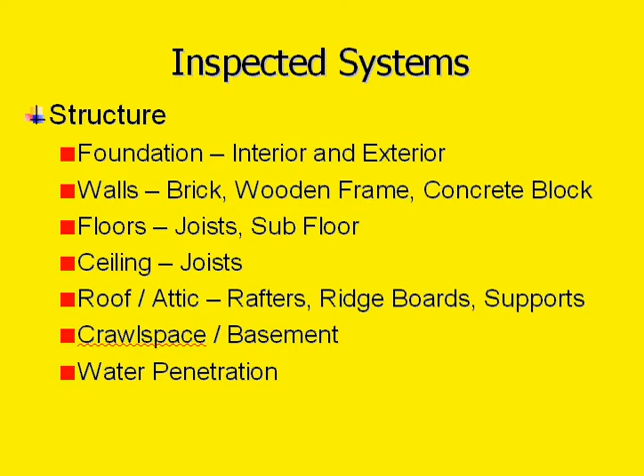Okay Michael, I've put together a presentation that could be the first webinar. This is by no means finished, it's just the start of it, and we're going to go through the things that should be inspected during the webinar. This is one of the first slides, and I'm just going to click through the slides so you can review it. You'll also get a copy in a PDF file, and I'll also do this as a presentation video online so you can look at it on your phone.

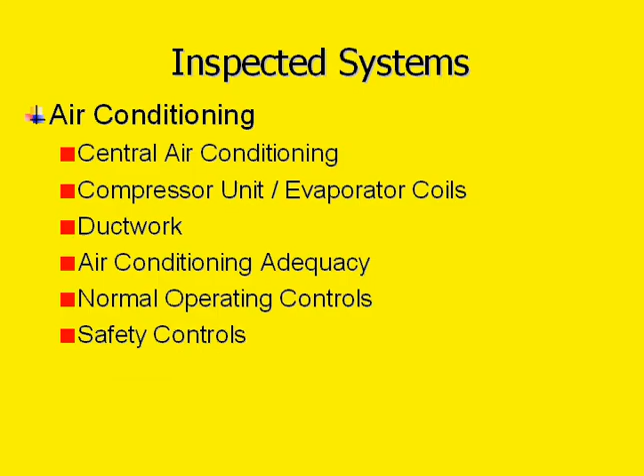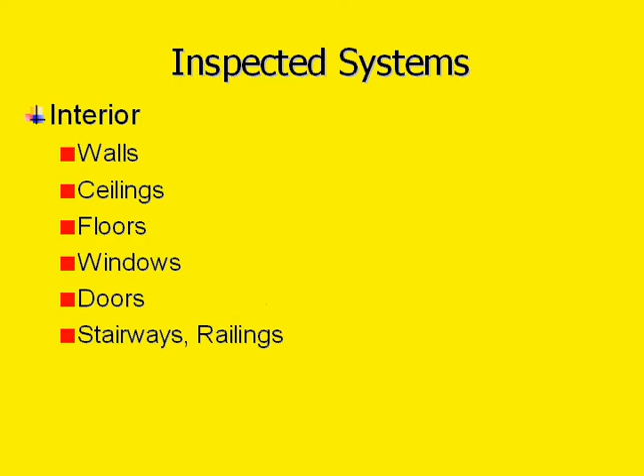We're going to go through the plumbing, the structure. We'll look at heating, consider air conditioning and what goes on there, and look at the roof and what should be looked out for in roofing systems in general. We'll talk about electrical inspections and how they're carried out. We'll also cover the interior - walls, floors, windows, doors, etc.

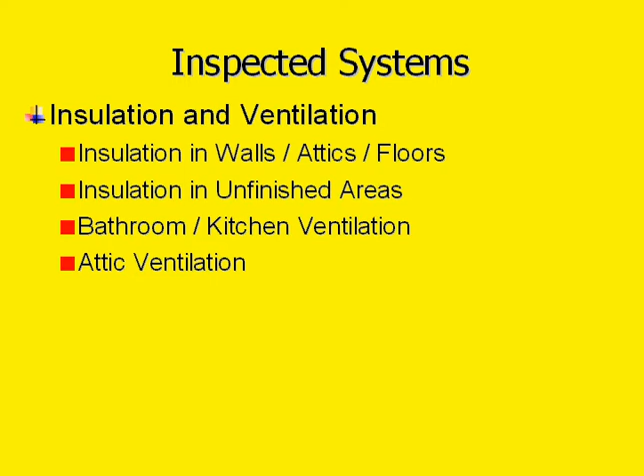We'll talk about insulation and ventilation, very important in properties. We'll talk about special inspections like radon, mold, insects, pests, environment, water. And then we'll go through the top 10 defects.

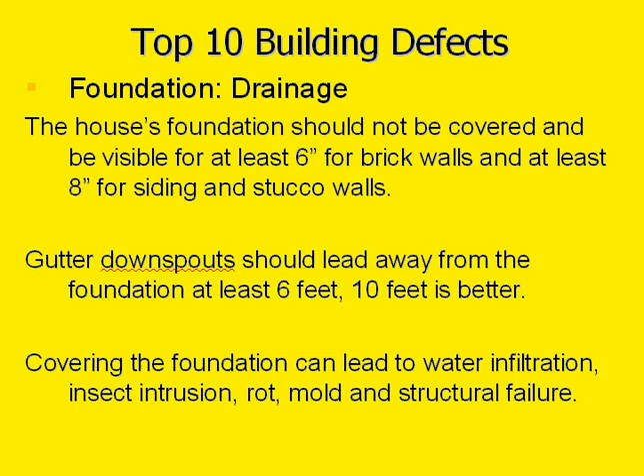This will be hilarious, I'll make it very funny if I can. But we're going to cover the things that I really find on a daily basis with houses - not least of which is where the grade is too high and it causes a lot of damage inside between the walls. People don't realize it.

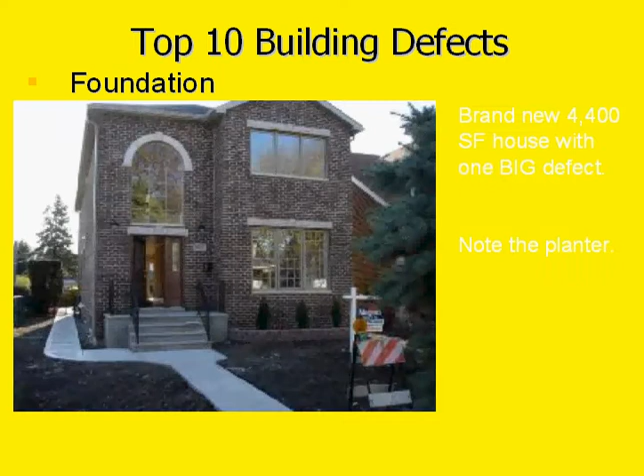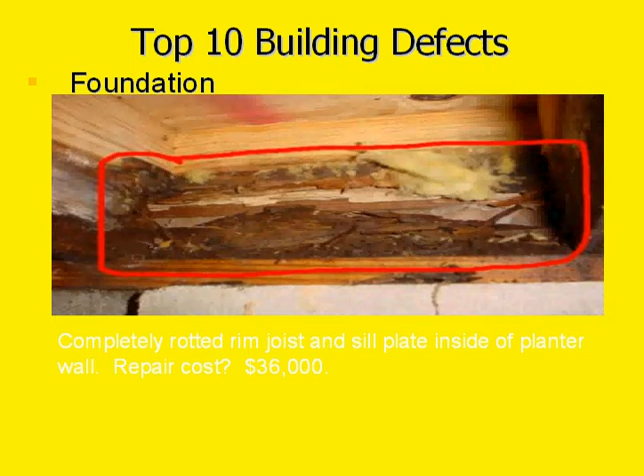Here's a typical house, and we'll talk about this type of house and what goes on when you put flower beds in like this. We'll look at what we find in joists and underneath houses, pier and beam houses.

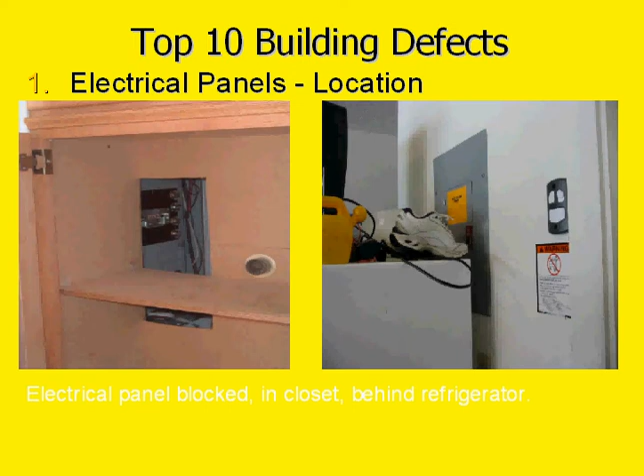We'll look at some really unfixable things, and then we'll go through the electrical defects. There's plenty of those that we can look at and talk to the buyers or sellers about.

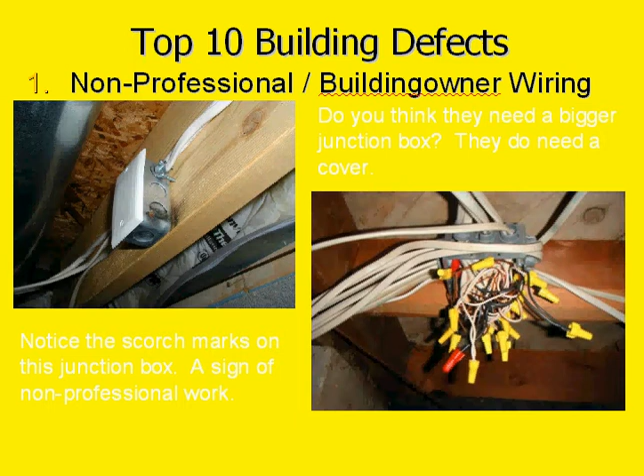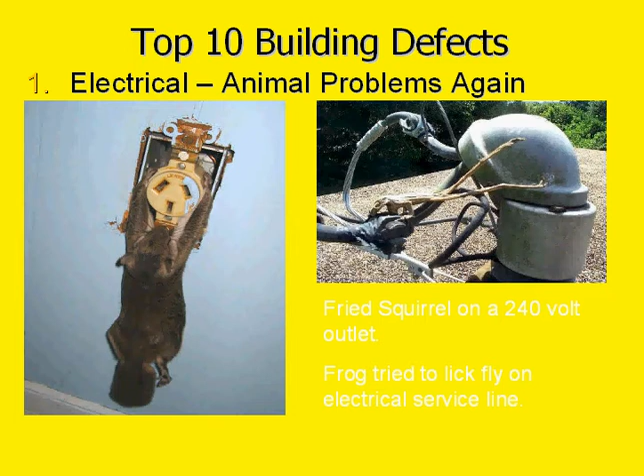We'll get through and look at things that go on underneath the houses, which I come across on a regular basis. And we'll get some hilarious pictures, like the squirrel here that got fried when it grabbed hold of a 240-volt outlet that the cover had been left off of, or the down drop here which has got loose wires on it. Hilarious - that'll kill you.

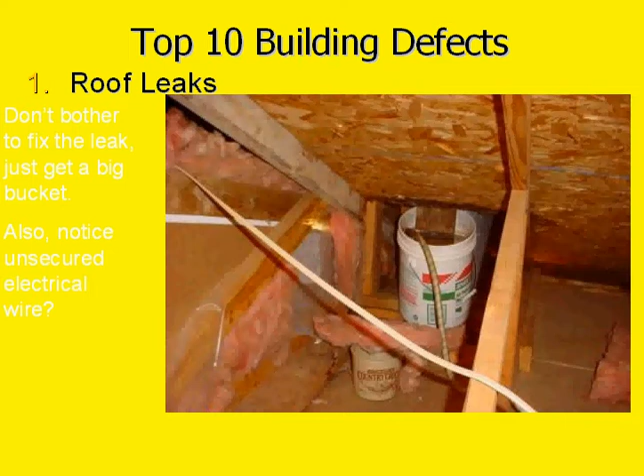And then we've got some explosive ideas we'll give to them. And we'll go on to the roof - we'll talk about the defects found in roofs, sort of leaks that have not been fixed properly. It's very funny, that is.

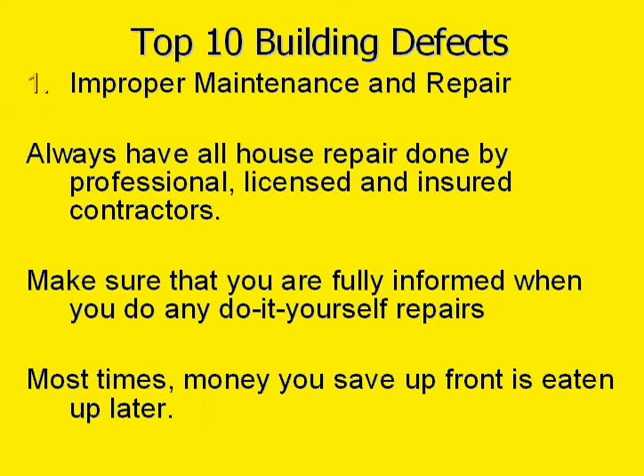And the heating systems, the things that I find commonly wrong with them. All of this we'll go through, and we'll get question and answers.

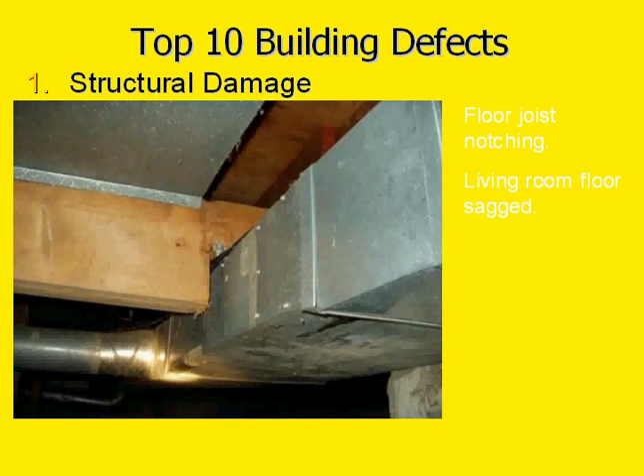At the moment there's quite a lot of slides here, and I'm thinking I might edit it down in number. I just wanted to make the content as comprehensive as possible at first, so that if we come through and decide we want to make it shorter, we can do.

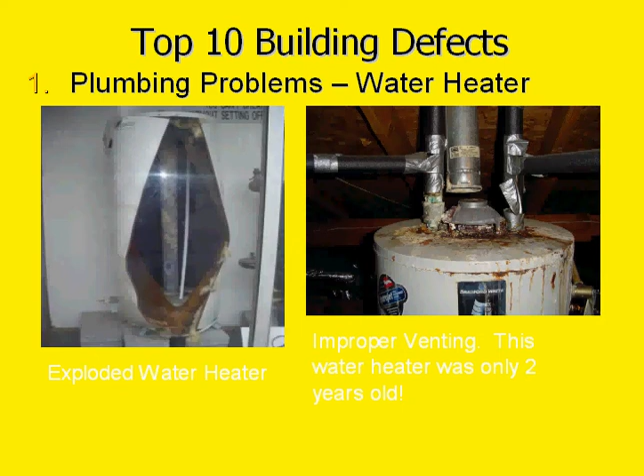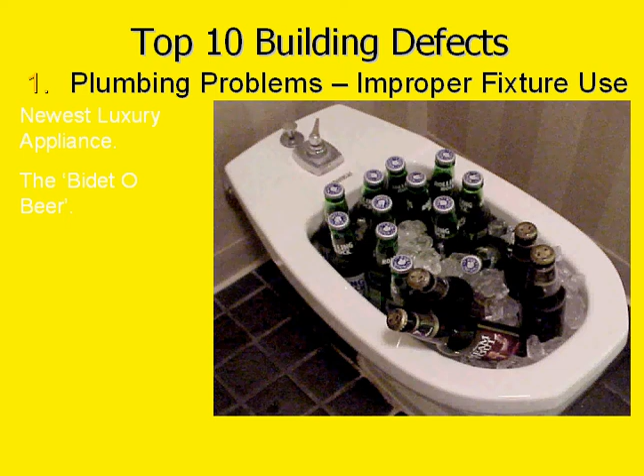Anyway, we could talk about that, and we talk about funny things I found in toilets and bidets - somebody kept his beer in the bidet. That's hilarious, oh boy. And then we go on about infiltration, water, etc.

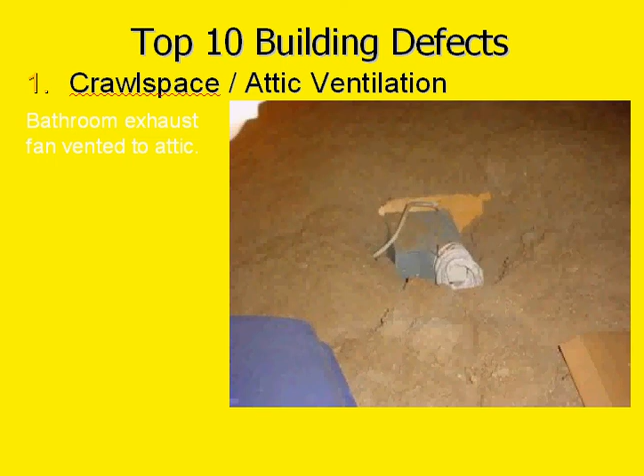All of this I can fit into a half an hour or so, maybe a 40-minute webinar, and at the end of it there'll be an opportunity to ask questions.

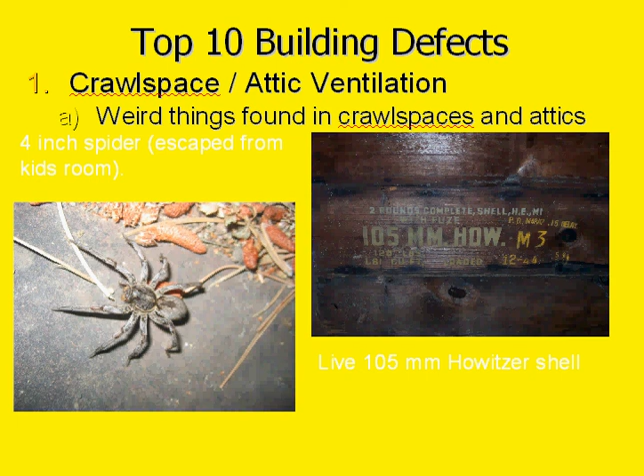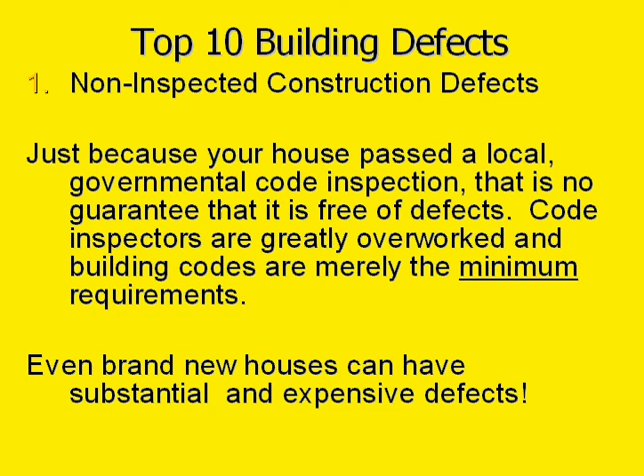Hey, what about this spider? It's 4 inches across, pretty big, huh? And we'll talk about all the other things that we find in there, and give people tips on how to look after their house, how to find things that are wrong before the home inspector comes.